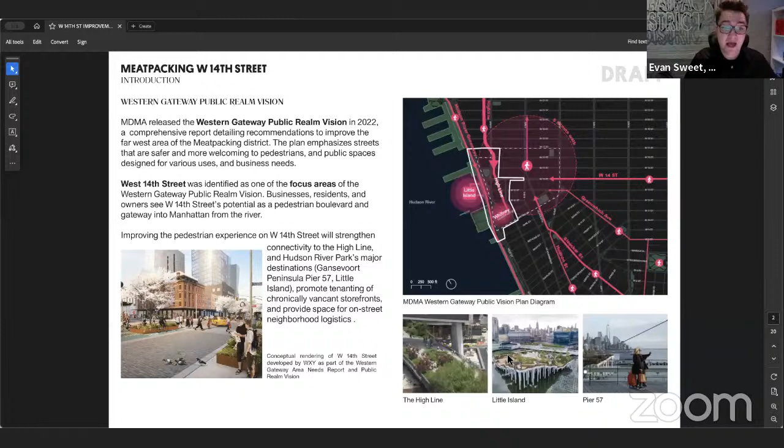This area was identified as a priority area for the Western Gateway program because of a number of challenges we see along that block, particularly its wide roadway, about 60 feet in width from sidewalk to sidewalk. We've unfortunately been seeing a lot of vacancy in the area on the commercial side, as well as a lot of conflict between cars and trucks. The TTP in place there has changed some of the character of the block, so we're looking at some of those issues.

There's also a recognition of a lot of opportunity along 14th Street, especially taking into account the TTP and as we think forward towards Central Business District tolling and a reduction in vehicle traffic in this area. Specifically, we're really looking to improve the east-west pedestrian connectivity and pedestrian experience in this area.

In the past 3 years, three major investments have been made along Hudson River Park and its waterfront in this direct vicinity: Little Island, Pier 57, and Gansevoort Peninsula. All of this has fundamentally changed the kind of service and demand for West 14th Street from a pedestrian standpoint.

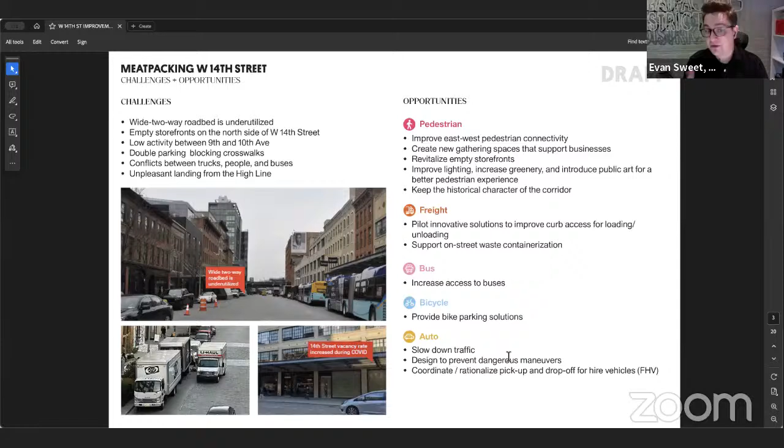We're also hopeful to think about how freight can be better delivered to this area and making sure logistics are supported. Another major concern is, due to the wide width of this roadway, the high volumes and high rates of speed that we're seeing autos use on this corridor, which, while adjacent to the formal TTP that begins at 9th Avenue, is outside of that boundary and therefore has a higher level of automobile usage than the core of West 14th Street.

So we've done a lot of work in the past year to inform this decision-making, including standing up a working group within the BID structure itself to solicit feedback from community members, property owners, and other representatives within the area. In addition, we've worked to host visioning sessions earlier last year to understand what the community is looking for in streetscape improvements, what are some of the key concerns and issues at stake, and how we can incorporate that feedback into the design, which we have tonight. We'll talk about that a little bit more.

In addition, we are also studying existing conditions in the area, specifically curb utilization, as this is really a question and a study about how we can improve the curb in the area. What we've found is that there's a lot of opportunity at play here, but also some key areas that we need to be considerate of as it relates to our intervention relating to the curb.

In our observations and studies, we identified the post office on the south side of 14th Street, just east of Washington Street, as a critical loading need. We also identified the two MTA bus stops along the north side of West 14th Street, one in front of 401 West 14th Street at 9th Avenue, and the other just west of Washington Street, as being critical infrastructure for the neighborhood. These service the M14D as well as the M11 and M12 buses.

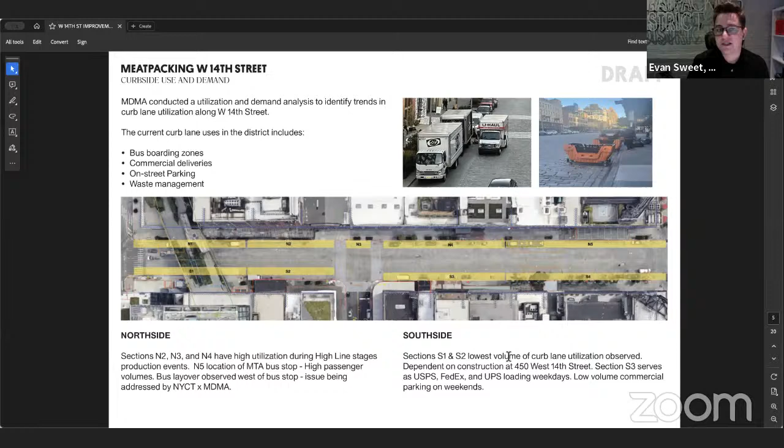We also identified Highline Stages on the north side of 14th Street, just at Washington, as a key generator with a lot of truck activity and an active loading operation. And then we identified a larger level of loading across the rest of the area, which is at a pretty regular cadence, although at times there can be increased loading due to specific events.

In addition, we also took a look at policy from the New York City Department of Transportation to understand how this curb works and is utilized in the context of the New York City Curb Management Plan. There we actually found that this street is under-managed, or not managed as well as it could be, because it's not accommodating all 5 functions that exist in the Curb Management Plan.

In the present, there's a lot of function for vehicle storage as well as circulation and movement, but we're not seeing that in considerations of safety. The idea of reducing automobile speeds in the area, and opportunities to expand the public realm within the curb lane, is something that we can take on here.

And then, returning back to our central focus of this project, which is transportation access and making sure that the pedestrian experience moving east, west, north, south through the meatpacking district, particularly along 14th Street, is at a really high level, and a level that we expect and want to accommodate for the neighborhood.

So with that, I'll turn it over to Mike Lydon of Street Plans to work through and talk you through the design that came out of a lot of this consideration and process, and show you what we have today.

Good evening, everybody. Mike Lydon, co-founder and principal at Street Plans. Joining me is Veronica Rivas Plaza, the very talented designer who's been working on this project, so all the pretty drawings and work you see is her good work. She can help answer questions later on. We're really excited about this project.

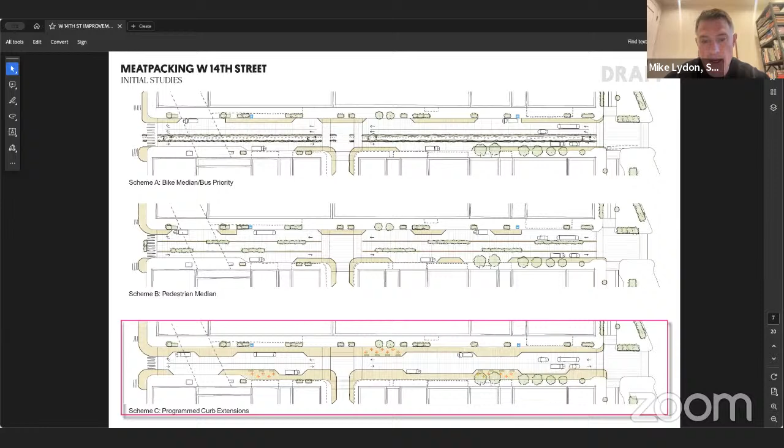We would maintain two driving lanes. We've got a lot of truck and bus vehicles to accommodate on this corridor, obviously. And we'd also maintain curb operations in terms of loading, freight, and pickup and drop off activity. You can see in the drawing all the little cut-ins there with the tan — that's where that activity would take place. So we'll zoom in now and provide a lot more detail. Next slide.

The solid tan would just be surface space that would get programmed in a variety of ways. And then the spaces that are striped, hopefully you can see that on the screen, those are decked areas. So we'd be extending the curb with decking, and that deck would be at the exact same height as the sidewalk itself. The idea would be to provide these respites in programmed areas that would be very attractive for pedestrian gathering and use.

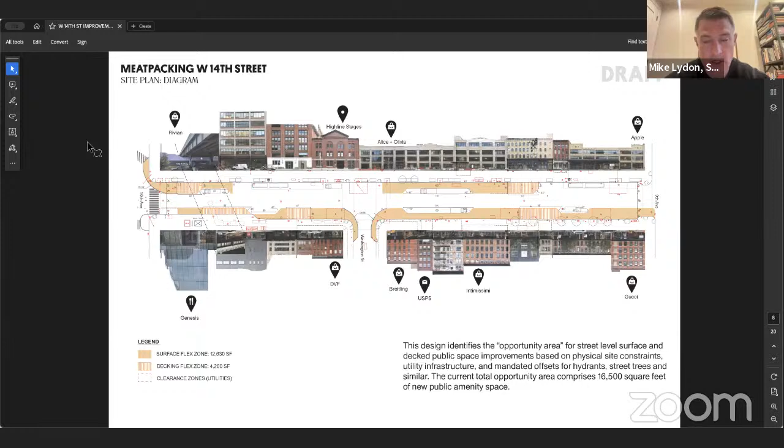We really had to be careful about how we sited these platforms. There's a lot of utilities, bus operations to be mindful of, the loading, High Line stages, etc. So what you see is largely the footprints of what we know to be feasible given all the constraints on the street today. In total, this comprises over 16,000 square feet of new pedestrian space along these 2 blocks on 14th Street. Next slide, please.

So the deck we're looking to use would be pretty flexible in the fact that it would provide access below the deck when needed without being super disruptive, in the sense of having to remove the entirety of the deck system all at once to deal with any issues that might arise. Next slide.

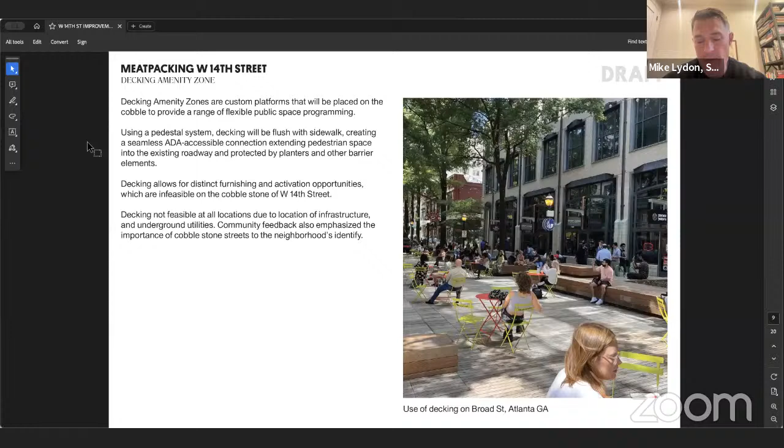So we developed 3 concepts on what those decks might start to look like and the kinds of activities that they would support. On the left is what we call the forest concept. It was really to bring more shade and tree canopy and greenery to the corridor. It would provide for informal social activity, additional plantings, and of course a variety of different types of seating on the deck itself. The kiosk option is looking to bring in potentially a small structure that could be operated by a vendor that provides food and beverage right on the street.

As Evan mentioned, the north side of the street has struggled from a food and beverage perspective, and we thought this might be one way to further animate the street, create a destination, and service the nearly 10,000 people who walk this stretch of street every day to and from 9th Avenue over to the High Line, and over to the far west side in the Hudson River Park. So there's a lot of activity here. We want to be able to capture that with an amenity that doesn't currently exist.

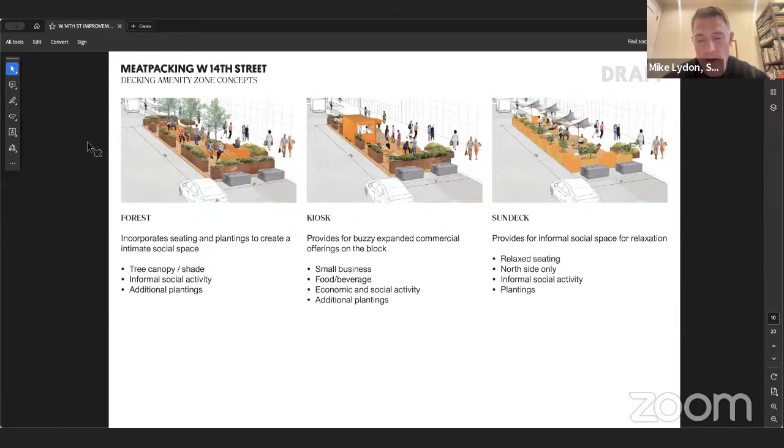And then finally, the sun deck option is kind of a playful way to recognize that the north side of 14th Street gets a lot of sun. In certain times of year, it'd be really nice to have that sun to enjoy. But with umbrellas and other shade structures, it might also provide some respite from that hot sun in the middle of the summer. So we're looking at ways to provide more of a relaxing environment on the street and let people gather. Next.

So those are the decks. This is more what the actual surface amenities would start to look like - this is the stuff that we could put directly on top of the cobble. These would be barrier elements and planters. We look to do bike parking in certain select areas, certainly add public seating, sanitation infrastructure like trash corrals, public art, plantings. It really becomes a flexible way to use the street, but would be a bit different in character and use than the deck system, and would also allow for more continuous mobility along the street as well. So it provides slightly different function, and certainly would allow for all the access to the utilities as needed today, because remember, the decking primarily is not covering any of the existing utility locations.

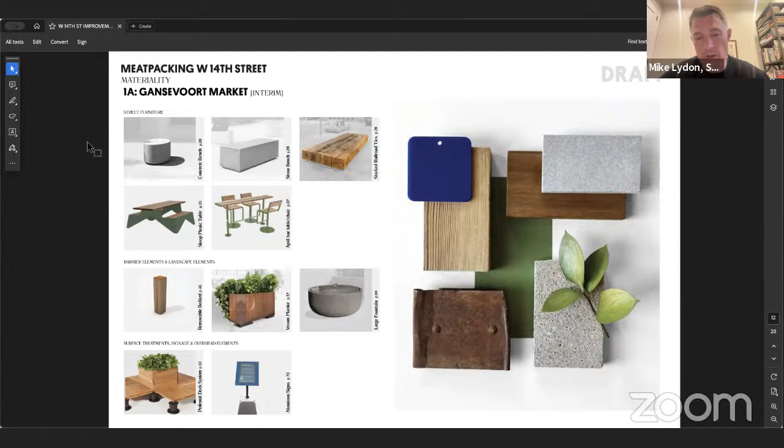As we were developing this work, we also developed a materials palette with the bid. We really studied closely the materials and character found already in the district, which is rich with history, character, and materiality. We wanted to make sure that even temporary or interim activations of the district, particularly on 14th Street, would look and feel appropriate from a design perspective. So we developed a series of what we called collections. What we're showing here is just one of those collections, showing how that palette of amenities and materials would come together to relate to the materiality of this corridor and the district.

Moving into more geometric design - this might be a little hard to read on your screen, we'll zoom in shortly - you can see the decks pop out here, and if you squint you can see some of the surface barrier elements that start to define those surface amenity zones, as well as where they bump in to allow for vehicular access for loading and unloading, pickup and drop off activity.

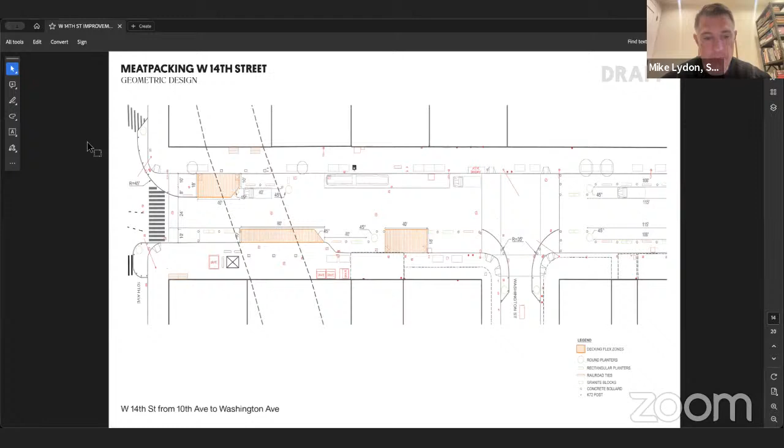Starting on the far west, you can see 10th Avenue on the left of the screen. We would have 2 decks that would fit partially underneath the High Line itself. The idea is to use the amenity of the High Line, but also amenitize it further so it doesn't feel as dark and uninviting as it might at certain times of day now.

We're also looking at expanding that sidewalk space to be a release valve for the high amount of pedestrian traffic this gets, particularly on the southern side where you have stair access to and from the High Line, which can be a real pinch point for pedestrians trying to get on and off, along with the activity of people walking east and west on the sidewalk.

We are looking at a couple of curb extensions that would reduce the crossing distance for pedestrians, make them more visible, and slow those turning vehicles moving north on 10th Avenue. That geometry would accommodate bus movement as well - we've designed it to accommodate those buses taking the right turn.

If you look at the screen, you'll see shapes such as rectangles and circles. Those delineate where those barrier elements might be placed, so we're using harder, more secure barriers where vehicles would be nosing in and out of loading zone areas, and lighter barrier elements where that activity doesn't have to happen.

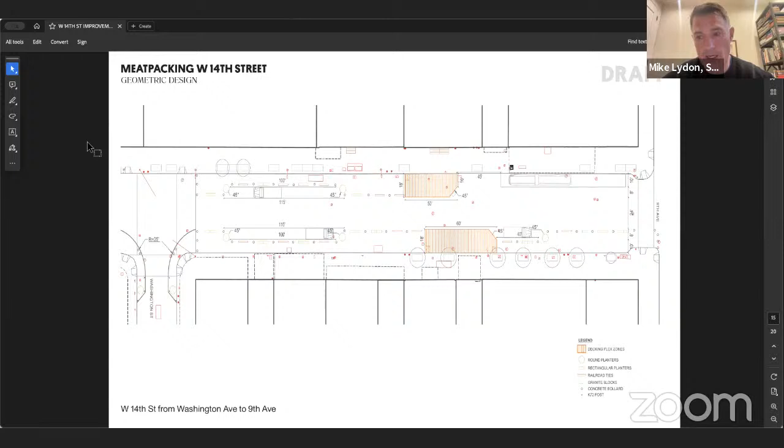As you'll see in a few minutes, on these decks we would have ramps to and from the cobblestone street level so you could move continuously along them. That would also help folks with strollers, wheelchairs, or hand trucks bringing goods off trucks - they could bring them up onto the decks via that ramp and over to the sidewalk to the businesses they need to access. So we tried to think through those elements as well.

All in all, there'd be a bunch of different programmatic uses of the curb here, from TNC pickup and drop off, to bus boarding, to our flex amenity zones, either decked or undecked, all incorporated into this design.

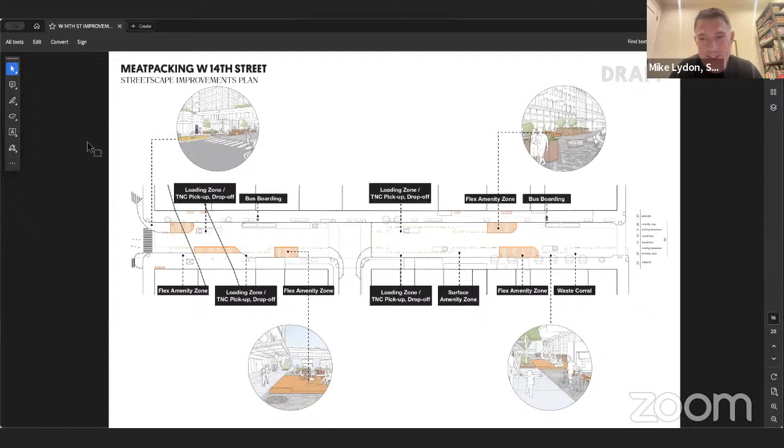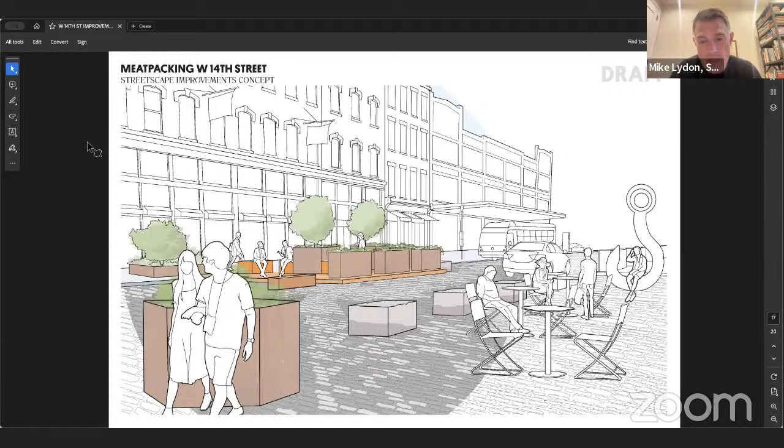You can see these little vignettes - we've got 4 little drawings there. We'll now zoom into each one to provide more character and detail. This is looking north, where that bus is in the background - that's the Apple store, just to orient you. You're seeing the decked amenity zone on the north side of 14th Street, and a surface amenity zone on the south side in that location, bringing together amenities such as greenery, planters, different types of seating, and barrier elements. In fact, in this drawing you can see some public art that might be interactive and sittable.

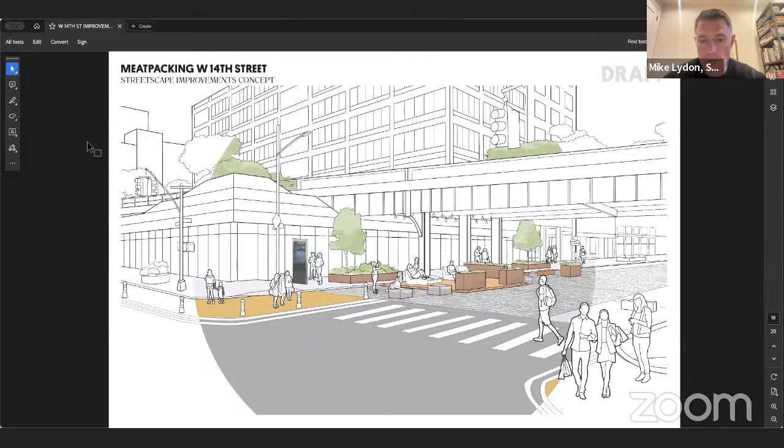Now you're looking at the south side of 14th Street, looking west at that stair that provides access to the High Line. In the background, you'll see some people standing on one of those decked extensions. So that's one of those exact moments where we want to provide more pedestrian space.

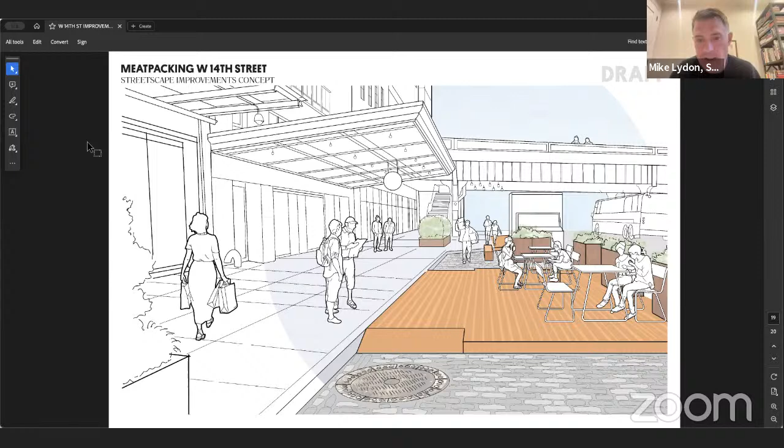And then in the foreground, you have one of those larger decks with just the basic seating amenity, which could wind up being a number of different things, but in the drawing here is just providing some public seating. And then those ramps appear very prominently, so you could see how you could move on the sidewalk east and west, or move along the street itself, and those ramps would give you access up and down to the sidewalk and the deck itself.

Next, this fourth drawing is looking again towards the west, and this is on the east side of Washington Street. So you're much further east here, and you're looking at how that public art and the deck system and the more relaxed lounge seating might be incorporated onto that deck system, and the inclusion of bike parking as one of the amenities that might be appropriate in certain locations along the corridor of 14th Street.

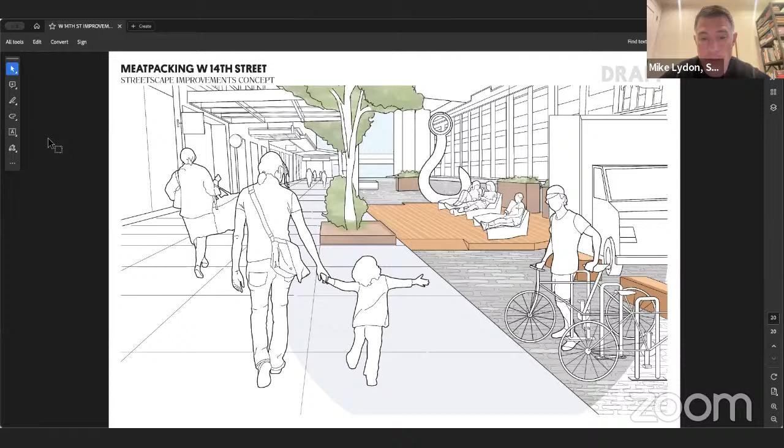And you're right about the granite strip for cycling. That's something that I think longer term might be appropriate on 14th Street, but that won't get installed anytime in the near future. So we're trying to maximize our opportunity here on the pedestrian side and operations side, calming the overall street. But that level of intervention would be a next phase of work.

That's so difficult. I mean, it would be nice to have it included in this phase, because that makes the riding so much more viable. I mean, it's a radical idea. That's why I'm asking. Yeah, absolutely.

So, at the end of the day, the BID is not able to modify the street itself. Everything we're doing is on top of the roadway, and that's just one of those things we're incapable as an organization to take on. Really, the street itself—the cobble, same as asphalt—is the DOT's domain. So we'd be happy to work and talk to DOT about that type of improvement, but from our end, we're unable to make that change ourselves.

I just wanted to—oh, sorry, go ahead. She just called. Yeah, go ahead. Sorry, Kobe.

No, I was going to say that in terms of public restrooms, we've identified nearby facilities, like in Gansevoort Beach—they just opened a facility for public bathrooms—the same at Pier 57, and we have Chelsea Market as well. So we can have those options in the area.

Okay, it's kind of funny—the rendering shows a bicycle on the cobblestones here, in light of the fact that you're not supporting bicycles with this. I don't know if I'm misunderstanding something. You're talking about adding pedestrian space, but you're really just adding parks on top of the street. Are you expanding the sidewalk anywhere that actually helps with pedestrian flow?

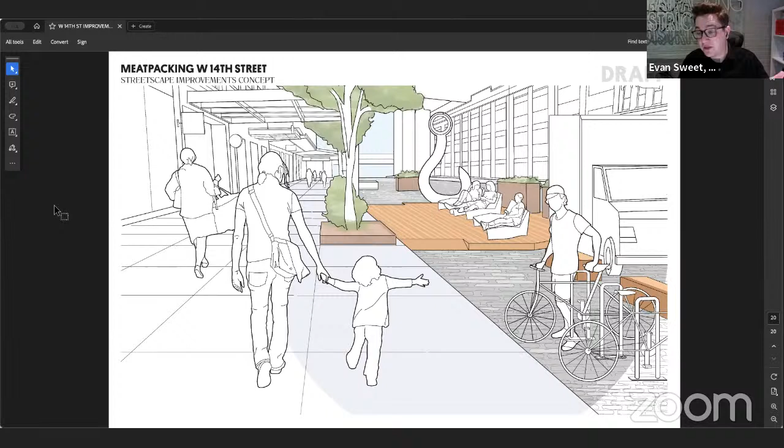So, go ahead, Evan. We think these areas are going to support pedestrian flow because the sidewalk is crowded, and there's ample additional space here. But it's also a project to amenitize the public realm and provide additional recreational space, as well as resource space related to bike parking or trash management within the curb lane itself—which we've identified as an opportunity to take advantage of the wide width of the roadway in this location and some of the other needs the city has identified for utilization of the curb besides just vehicle storage.

Okay, I'm going to disagree with you on that, because you just said something contradictory. You said you're not expanding the sidewalk width, but you're adding destinations, which could actually add pedestrian load on the sidewalk—so you could be adding to congestion. So either you're adding more pedestrian space for flow, or you're not. But those, yeah, those look like very nice places to sit. Don't get me wrong, I think those would be enjoyable additions. But if the goal is to improve pedestrian flow, and you're talking about how the street's too wide, well, the obvious solution is just to make the sidewalk wider and take that space away from the street. So that was my very first observation from the get-go.

The other thing—and I know David was talking about the bicycles—I know this isn't something in your jurisdiction per se, it would take a lot of coordinating with DOT. But they're often coming to us asking how do we get people across town on bicycles more efficiently.

Finding a river to river route is actually challenging. It seems like the city spends an awful lot of time trying to find alternatives to vehicles on 14th Street when they were planning the whole L train shutdown.

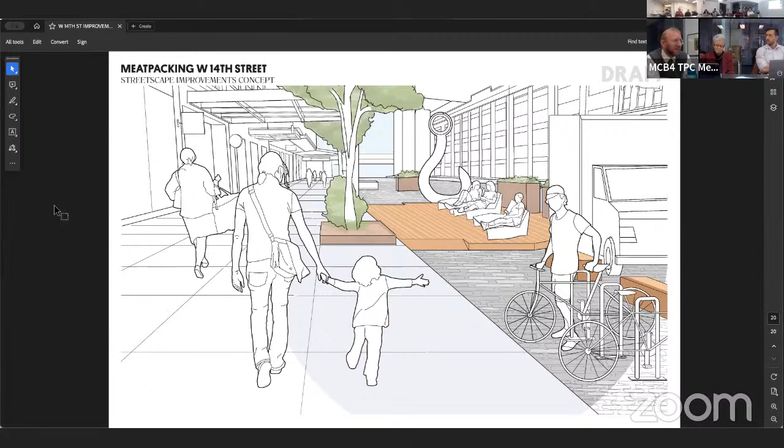So we're also looking at ways to create two-way bike lanes. Something down the middle of the street would be revolutionary. I think we don't have to reinvent the wheel here. Given that we're only on the north side of the street in our district, I want to talk about the south side anyway. I would look at the north side of that street, where I think you have fewer of the delivery spots, as a potential area to engage with DOT as your gateway to a crosstown bike lane before we start laying these out.

I mean, I guess it's great that they're movable, so if we can just slide them to make way for a bike lane later on, that'd be great. But I would encourage you to look at how this is a gateway between the Hudson River Park, right underneath the High Line, and welcoming people into our district and our neighboring district, recognizing that a lot of people are bicycling. They're taking the Citi Bikes. There are a lot of Citi Bike stations around there. They can hop off the bike and go shop in the Gansevoort district, which should be good for everybody, at least those that can afford to window shop. I can't, but that would be my comment here.

Thank you very much for those comments, they're heard. As a cyclist myself, I agree, some of these issues as it relates to cobblestone and use of the bike are certainly a challenge. And to let you know, we're certainly working with our partners up and down 14th Street, east to west, to think about a holistic change to the street. Again, as Mike has mentioned, this is not something we're able to accomplish in the immediate or interim term, which is why we bring you this kind of tactical approach to public space improvement. But as conversations continue with our partners from DOT and other BIDs along 14th Street, these are things we're including in our discussions about a larger improvement that could happen in this area.

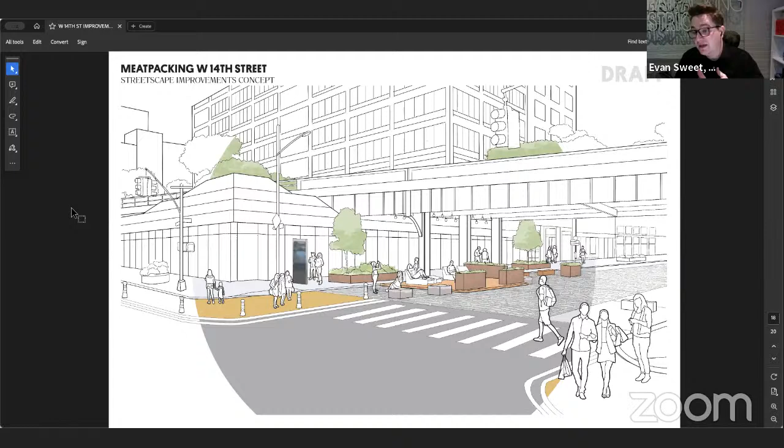Yeah, absolutely, thank you for those comments. On that update, there was construction at that corner of 14th and 9th for the past 2 years. We're really excited and happy to see that wrapping up, and with that construction being done, I think there's a strong opportunity to work with the city to help coordinate a better improvement at that bike lane. I think it's a concerning location because there's almost that blind left-hand turn as you change the geometry from 9th Avenue to Hudson Street, as well as a large volume of trucks and buses making the left-hand turn to 14th Street. So I'm happy to consider and work with CB4 as well as the DOT to figure out what a solution could be there.

Great, Christine? So yeah, it looks very good. Following on 14th Street, narrowing this intersection - there's too much space there. Would be really nice. So I don't know whether you want to use your portable system and monitoring system to try to narrow this intersection and make it smaller.

But the bigger question is, you are removing a lot of parking spots, which is fine with us, but how are you going to prevent people from parking in the bus stop? You need to think about a treatment there, because I presume people aren't going to find parking and they're going to go park in the bus stop anyway. So I don't know whether there's a paint you can use to show people where the bus stop is, or some protection, but I really believe you need to manage that as a mitigation.

Well, go ahead if you want. Yeah, thank you for that comment. I think we can certainly look into that.

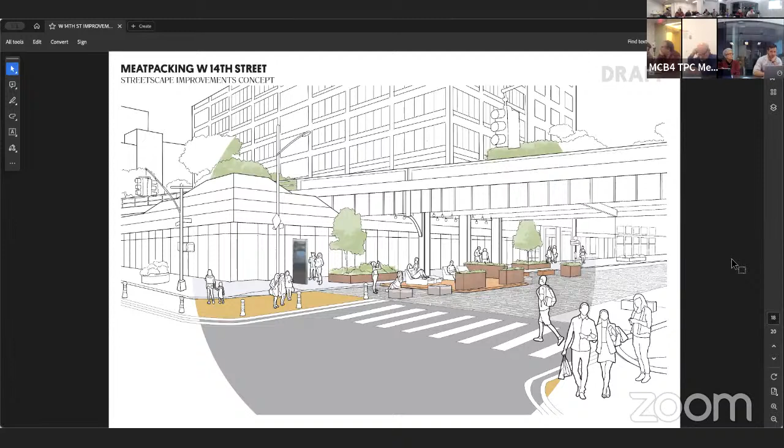Jonathan Wiseman, I'm a local resident. I just had a quick question, also involving a little bit DOT. I'm trying to figure out, I know it's about bringing more business to the meatpacking district and really trying to develop 14th Street. I'm just trying to see, with the BID, are they just talking to DOT?

Because it seems like any southbound eastern traffic or vehicles moving that way will no longer have access to go down 14th Street. So I don't know if that was considered, because now 15th Street is going to be more crowded with more vehicles. And I feel like people coming around to 14th Street to get to Washington, it's going to increase the flow of traffic and be a bit more dangerous at 10th Street. Also, how would delivery trucks get access to that area? I don't know if that's a question for DOT and the BID, if they've worked together to analyze that. So I'm just trying to figure that out. I don't know if that made sense.

So, yeah, just effects on traffic, I guess, is the bigger question. Let's ask Ivan to answer.

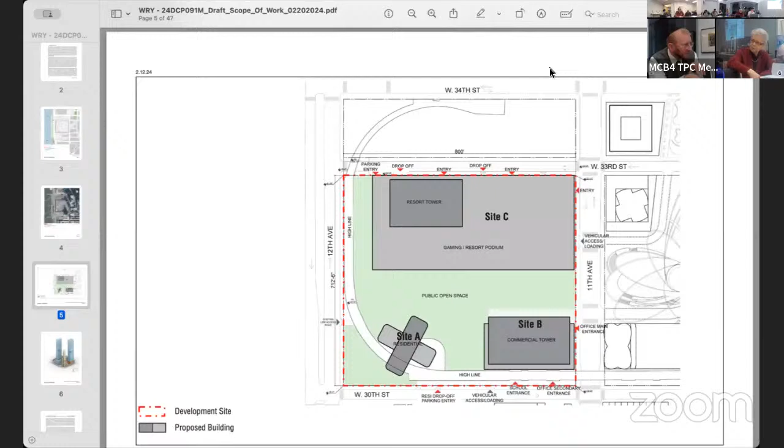No, you can't enter there because you're getting into the yards, the railroad track - right before you get onto the track. Oh, you can do it below, right? Yes, that's a good idea. So regular traffic goes on the highview street, but if you go deep, you're going to hit the tracks.

To echo Brett's comments about the driveways in Hudson Yards, I see this public open space and it looks nice, but the public open space in Hudson Yards is very underused. Mostly we just see black Uber SUVs driving on it. Let's make it an inviting, real public park space. We have to save the park, not just like sea green, we want it to be sea green. I don't want to see gray with black Cadillac Escalades on it.

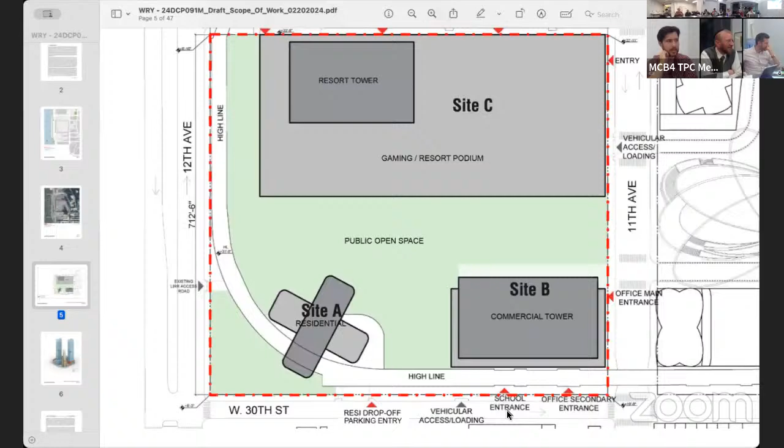95% or 100% planted. Can kids run around without fear of getting run over by a bus? It needs to be planted—could you throw a frisbee, can you play ultimate frisbee? That's exactly what I said, that is exactly it. Okay, so it's planted, and the ground surface maybe should be something like 5%, not asphalt, maybe 2% cobblestone for people to walk around. Passive and active, just a place where people can go and they have the right of way, not the car.

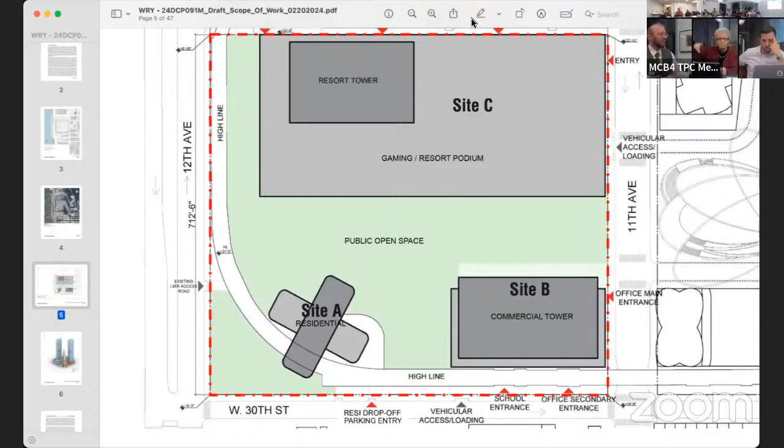We need to be more aggressive. So these are the transportation things—obviously the traffic, how many cars are coming down 34th Street. Should we say it should be elevated, like even a 1 foot curb will deter most vehicles, that'd be another way. The problem is, in Hudson Yards today, cars go in there because the whole thing is flat relative to the street, so you can just drive through. But even a 1 foot curb, that's not an obstacle for a person on foot, they can just walk over it, but it is an obstacle to a car. That would be a deterrent from it ever being functionally a road.

That's why we did the rezoning lawsuit. Where is this going? All the affordable housing that was supposed to come out of that rezoning, they got upscale housing instead. We haven't seen that. We were furious with Christine Quinn, we had a very bad meeting. She was on the council and she caved. Yeah, stadium.

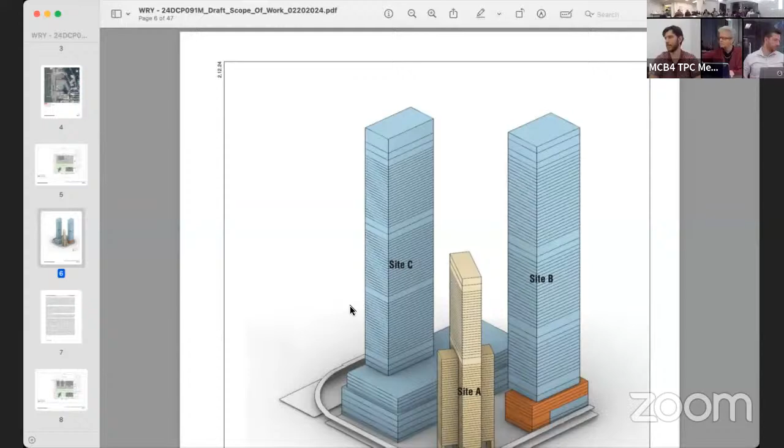I think we also asked for a library. I recall we've asked for a library. You guys watch it on YouTube? I guess if you do your job.

Okay, so does anybody have any other concerns we should put in? And this in no way authorizes a casino. We're not discussing the merits of the casino.

We'll get the letter passed around from all the communities. As far as the scoping letter goes, it's not a critique of what they gave, it's more like please study this, please study that.

Because we don't think it's a good idea. And it's far away on the west side, so maybe traffic won't be a major issue, but they're going to give people waivers for congestion. The casino's going to say, we will cover your congestion fee. They're definitely going to do that. Free parking too, no waiver, oh that's a good one.